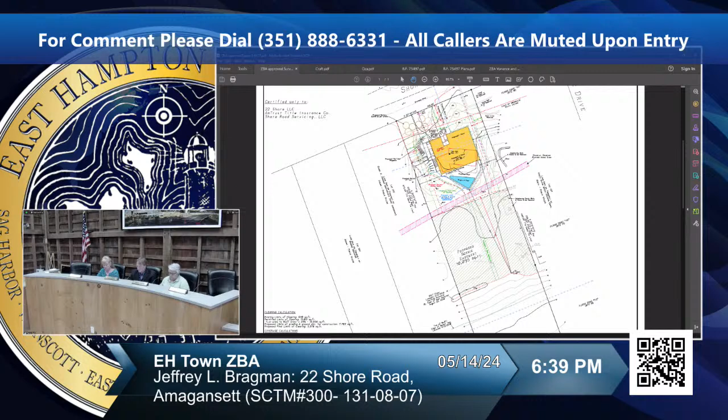Good evening, board members. My name is Jeff Bragman, and I represent the White Sands Motel Holding Corporation. This appeal is different from your usual involvement with appeals. I know the zoning board often hears about appeals taken from your decisions that go to court. An appeal made to your board is a little different in terms of the burden of proof and the rules of procedure.

Essentially, when you appeal the action of an administrative agent, your hearing is a do-over. It's a completely new hearing. Lawyers, to make it fancy, call it a de novo hearing, which probably sounds like what it means, which is it's a new hearing.

In this case, when you appeal what the building inspector has done, your obligation is to put yourself in the shoes of the building inspector and make any decision you think ought to have been made in the first place. So it's unlike an appeal from the zoning board, where there's deference to the local board, and the only way to overturn it is to show a very high standard of proof, which is arbitrary and capricious behavior. That's why courts often say, well, we can't substitute our judgment, we're relying on the expertise of the local board unless you show us it's completely unsupported by substantial evidence. Not the case in what we're doing today.

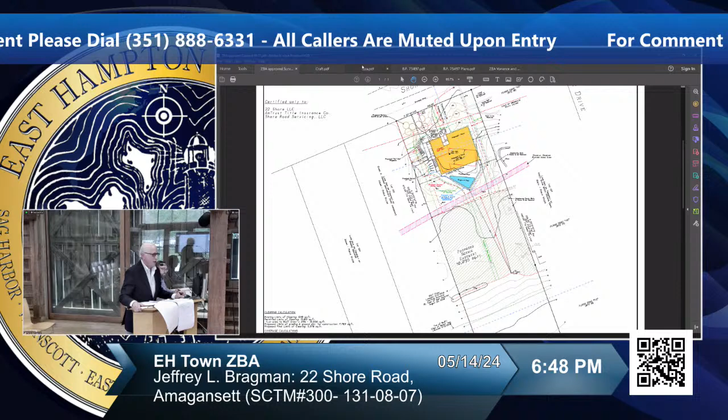I want to just take a look at the exhibits. The first one you can skip over, it's the survey. I just gave it to you so you'd know east from west. The second one is the architectural plan, labeled A301, and they show two elevations of the house. You may remember this. The first one at the top is looking at it from the west, the western wall facing west, and the bottom one is looking at the wall facing the east.

And I've brought with me today two experts to give you a more detailed discussion about the plans, inconsistencies, omissions. Kevin Paul's a certified flood person, he'll tell you what the actual title is, and Dan Aiello is a structural engineer. A floodplain manager is what he's called.

And what's striking about the first elevation is that it basically doesn't show anything other than the side of the house. And just looking at it, as someone reading the drawing, not an expert, it looks like there's going to be a pool that's elevated and an area that's going to be occupied by fill, adjacent to that room that they're going to create below grade, and there looks to be other fill on the other side of it, and there's no other structure, nothing else really revealed there that would excite any great deal of attention.

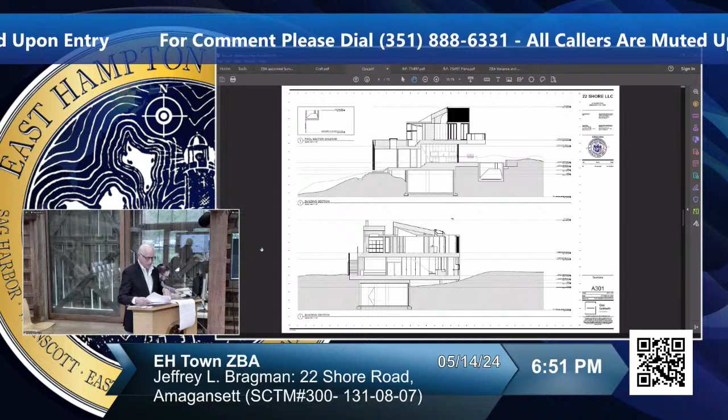The second exhibit that I've given you is an excerpt from the construction protocol that was given to you at the zoning board, and you may remember. Hold on, can I ask you, your cover page to that...

A301 says 'no natural grade,' yellow highlighted. What are you referring to? On which page? Your cover page here says Exhibit B, it says no natural grade, yellow highlighted. What are you referring to?

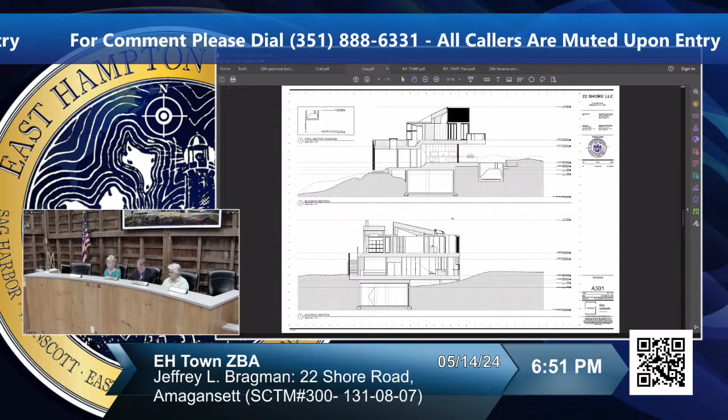It's real tiny, a very tiny yellow highlight. But it's not really part of my discussion here. That's what they identified as natural grade. They took natural grade from a measurement down by mean high water, and it's repeated on here. But the point of this drawing is just what the drawing shows, not the yellow highlight. Sorry about that.

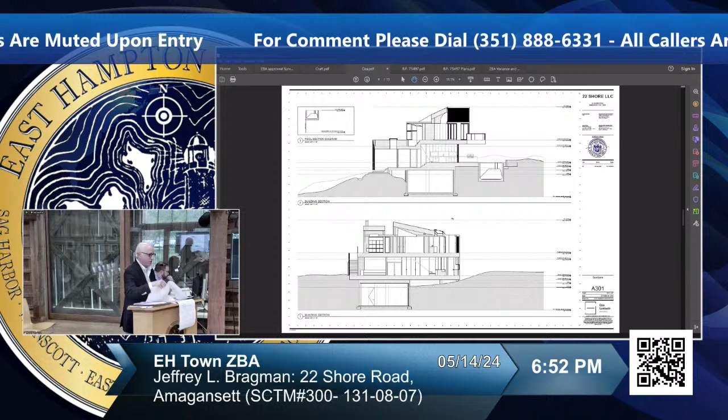The next exhibit was the construction protocol, an excerpt from the construction protocol that was given to you on the night of the presentation. It has two areas that are yellow highlighted, and basically it gives a little bit more information about how they were going to undertake the construction. You may recall that the architect, who I know is here tonight, basically said that they were going to carve out a horseshoe-shaped cut in the dune.

They were going to install a lagging wall, and then—I'm paraphrasing, but you can go back to the meeting if you think I've misstated something he said—they would try to do that as close to the edge of the construction as they can get. Once that's up, it's basically pretty typical construction. We are going to build up some structures to raise the pool and raise the house, and then we're going to backfill it. That's what he said.

When you look at the construction protocol on item 17, it indicates that the lagging wall was going to be removed. The lagging wall, for your information—I had to look it up—is the horizontal wood. They put in pilings they call soldier pilings because they stand at attention, and then they fill them in with lagging wood, which distributes, as I understand it, the load horizontally. So it's called a lagging wall.

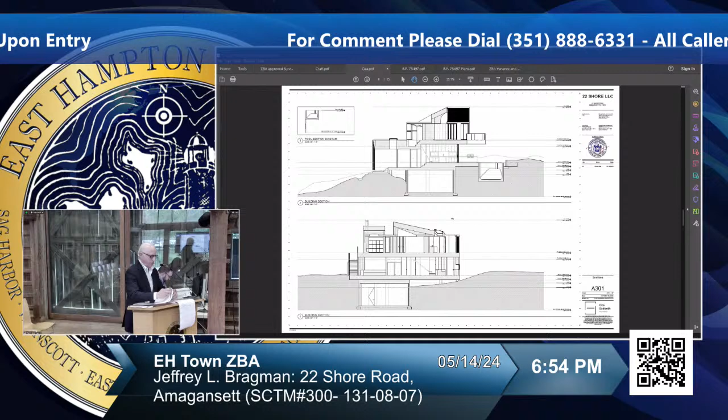So this construction protocol says we're going to remove the lagging wall, and the architect said then we're going to—again, I don't know if this is the technical word—fill the space. I assumed it was with material they had excavated, that they're going to put it back in. He also said that everything below there was going to be breakaway structures, concrete was going to be breakaway structure, because the other comment in the construction protocol was that they were going to excavate down to the level where they were going to put the concrete mat at the natural grade, basically. He said when we create that room that they wanted to create, everything's going to be breakaway—breakaway walls, breakaway concrete, everything's going to break away.

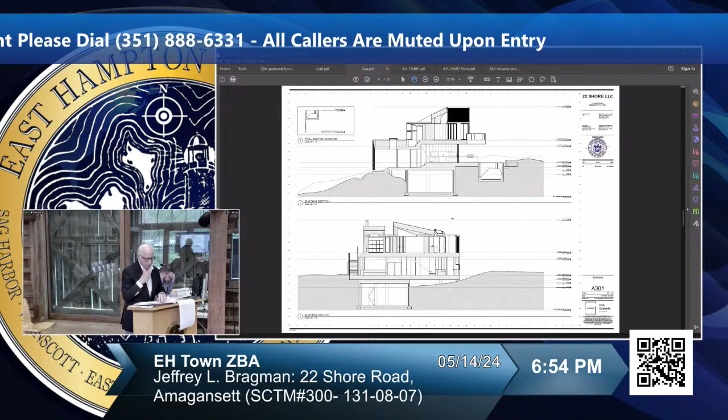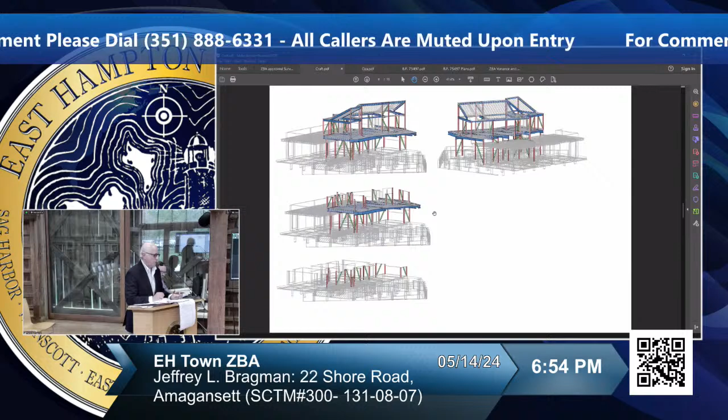So what I want to do now is take you to Exhibit D. This is the structural plan. This went to the building inspector as the local administrator of the code. This is the document that actually tells you and shows you a little bit more about what they were going to do.

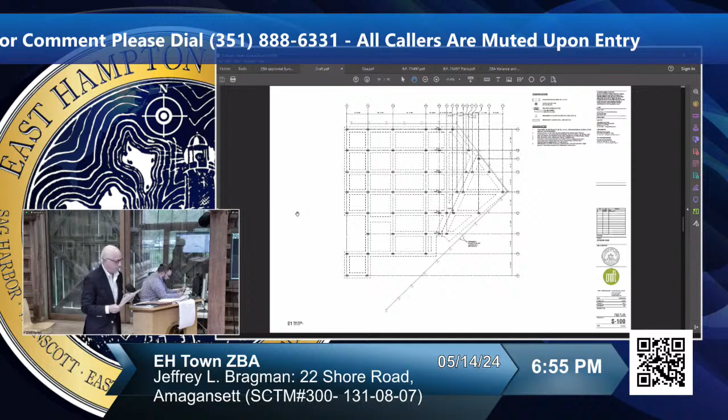It's a big structure, and I have photos if I can find them for you, but I don't know if I can find them handily. Okay, I'm going to hand this up.

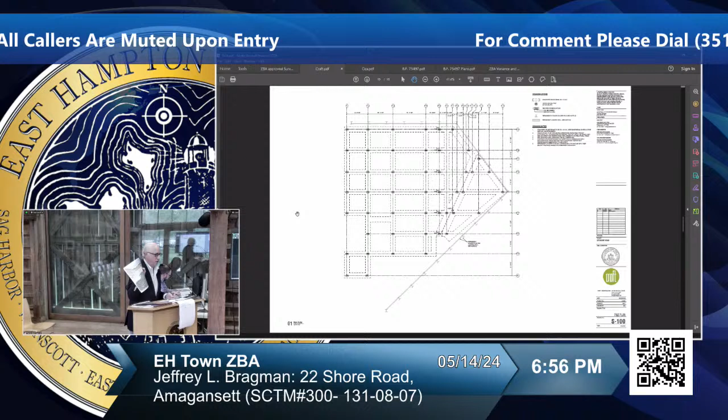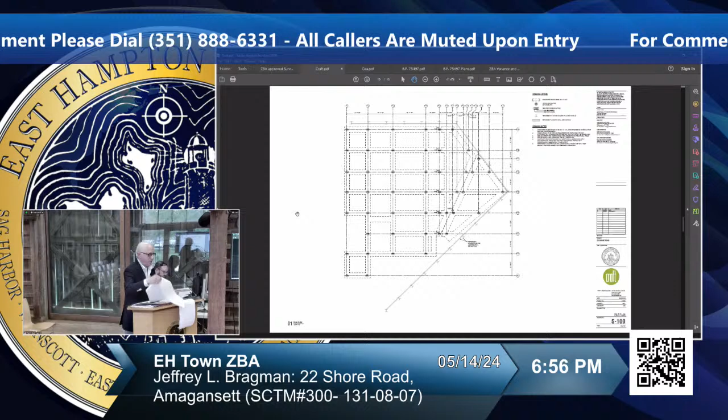The photo that I just gave you is a little bit of an indication of the scale of this wall, because you can see there's a front loader in front. There's some distance, but the wall looks to be about 15 or 16 feet tall. The second diagram in the same exhibit, if you flip the page, shows you the relationship between the proposed pool and the wall.

Now, what you may notice is different here is what I've yellow highlighted, and that is that the notes now say that the lagging wall is permanent. Not temporary, it's permanent. That's a pretty big change from what you were told when you looked at it as a zoning board. But that's what was given to the building inspector. The construction protocol said that it was to be removed. The architect said it was going to be backfilled with sand, and now it's a permanent wall.

In effect, what it is, is a seawall. They're effectively building an armored wall around the house, and it's going to extend as shown on these structural plans. The wings of it—the reason I showed you the first elevation—is because the wings of this extend against the elevations that I showed you. But when you saw the architectural plans, you didn't see any of this. The board was not aware of the structure that was going to go in there.

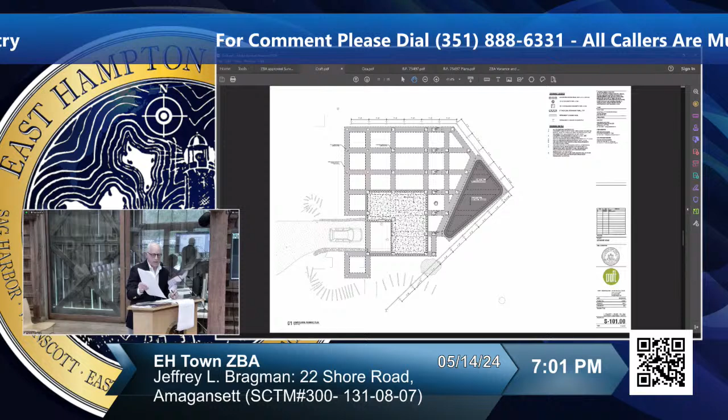And then I also gave you a 3D image in the same exhibit, which shows how that wall is going to be constructed. The first image just shows up to the first floor, basically, and then if you flip the page, it shows the higher area. But you can see that the wall, especially on the second 3D image, extends across that elevation that I showed you in the beginning when I began to speak. You can see it there, but you didn't see it in the architectural plans.

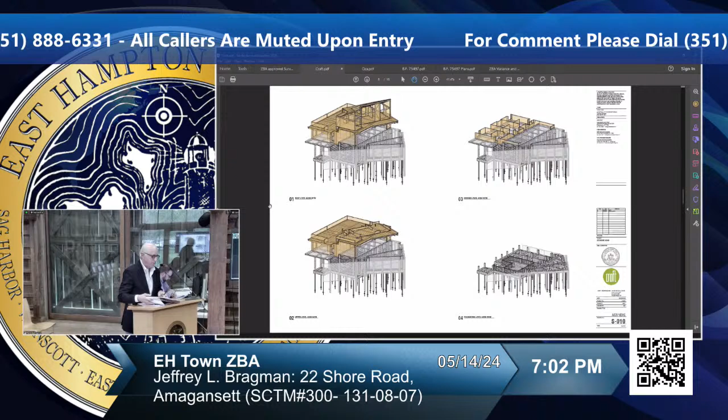Now, there are some other problems here, and they have to do with the breakaway walls, which we understand, and the concrete flooring that's supposed to be breakaway. But that's getting a little into the nitty-gritty and the more technical construction details, so I'm going to hand that over to the experts. As I said, Kevin Paul, who's the flood management person, and Dan Ayala, who's a structural engineer, can take you through the more technical aspects of the differences between what you saw and what we're getting. And then I want to reserve a little time to come back and just chat for a couple minutes. So we can start with, I guess, Kevin.

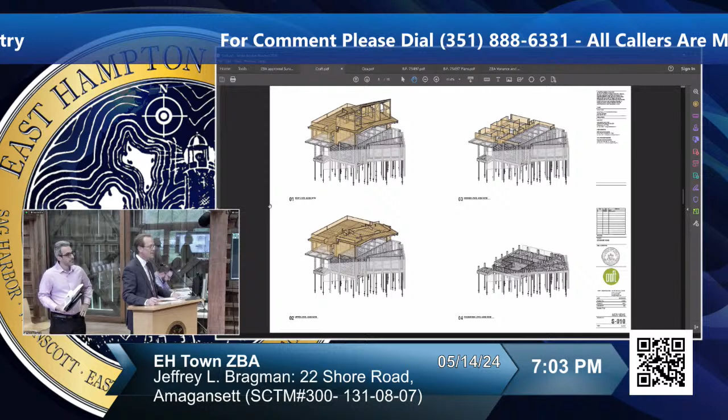Announce yourself, who you're with, and your address. Certainly, my name is Kevin Paul, I'm a registered architect and a certified floodplain manager, H2M Architects and Engineers, 538 Broad Hollow Road, Melville, New York, 11747. Okay, do you swear, affirm to tell the truth, the whole truth, and nothing but the truth? I do.

Thank you. Okay, before I introduce Dan, who is a structural engineer, I just want to give a little bit of background. Chairman, I must object at this point.

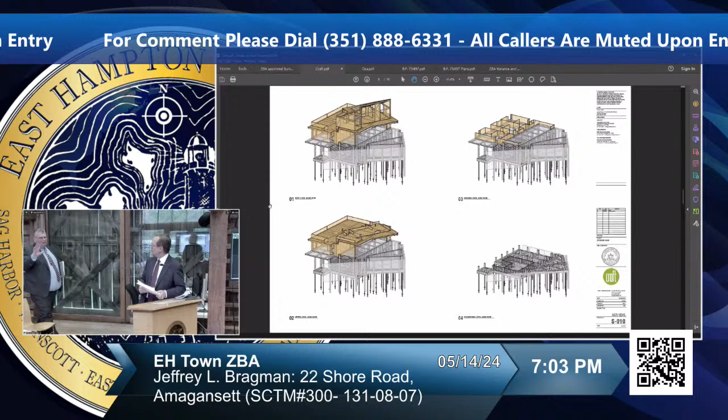Does the gentleman from H2M have a waiver from the town board to appear in front of this? As far as I know, H2M is a consultant to the town, and pursuant to the town ethics code, it would require a waiver to appear in front of this board. Does the gentleman at the microphone have a waiver to appear in front of this board?

These gentlemen work for H2M. They have nothing to do with the area of consultation that H2M is involved with in the town. They're advising the town on the senior center, on traffic and parking. They're in separate departments, they don't deal with each other, and we can submit paperwork on this afterwards. There's no conflict here. It's like the same thing with attorneys. If there's a separation between professionals in a larger organization and they don't deal with any of the administrative details or substance of the other representation, there's no conflict. They're licensed professionals just like attorneys. So we can deal with that, and I can give you paper on that if and when it becomes an issue. Just note my objection.

Thank you. We note your objection. Thank you.

Anyway, in working with Mr. Bragman and reviewing the structural plans and the architectural plans, I identified a couple of issues. And once again, from an architecture standpoint, what a lovely building. I understand you got an award from Peconic AIA, congratulations. Our concern really has to do with flood mitigation and the effect that not only this retaining wall has on the dune, but basically the idea that there's an enclosed space below the structure.

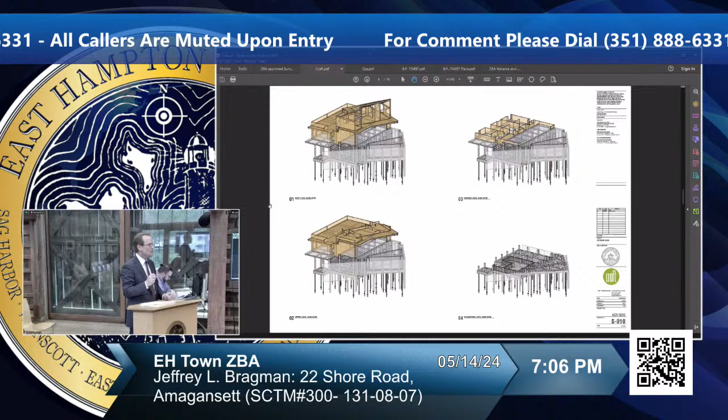So once again, the idea is that under FEMA and under the New York State Building Code, anything below the house should be open and allow the easy passage of water, hence breakaway walls. In our investigation of these plans, the walls that are labeled breakaway on the structural drawings are effectively fully reinforced. They're connected to the grade beam, which is connected to the pile, and also connected to the structure above, which is a violation of the building code.

This wall has to fail with 10 to 20 pounds per square foot of water or wave action on it. Reinforced the way it is, it's not going to fail. The biggest issue is that it's designed to withstand the backfill or the regrading of the sand back against the walls. If it can withstand the sand that's backfilled against the walls, it can't be breakaway.

So we have a bit of an issue with the fact that the concrete slab, which should be frangible, is not, as it's described in the plans. It has wire reinforcing in it. It's 5 inches, not 4 inches, which is what's determined by code. So there's a couple of inconsistencies with how this underneath space is actually constructed and how it should behave under code. That's really the main thing we looked at.

The code analysis we did, which is part of the exhibits, shows basically the loading you would expect at the top and the bottom, and some other issues. There's no flood vents, which would normally be required even in previous codes. Flood vents were not required in the VE zone or the coastal A zone before, but they now are. There's also some mechanical equipment and electrical outlets down there that shouldn't be.

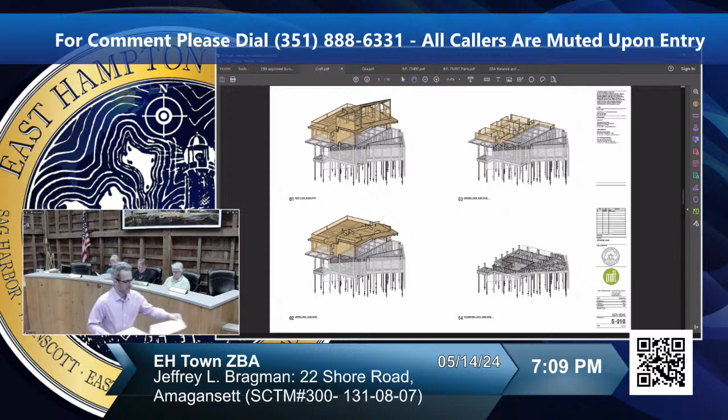So I have here a little memo outlining the issues that we found, from our third party review. If you get to the third page, that's the calculation that I performed.

So if you turn to the second page, there's an image, attachment 1 of my calculations. More or less, we proved that the pressure you're going to see at the bottom of that wall is 660 pounds per square foot, which is over 30 times what the code allowable limit is.

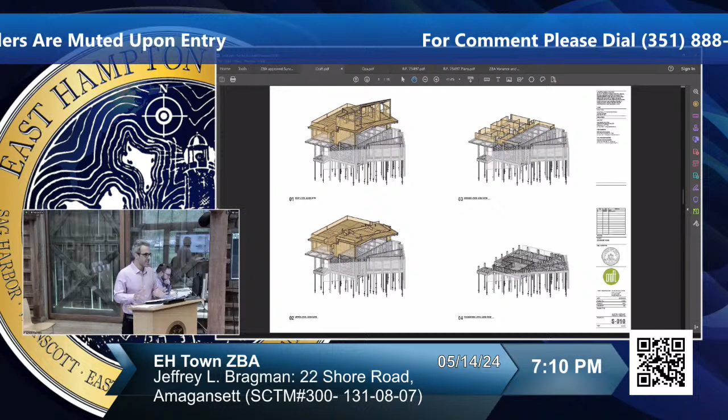So if you read the code, it more or less says walls designed to break away or collapse, without causing collapse, displacement, or other structural damage to the elevated portion of the building or supporting foundation system, shall have a resistance not less than 10 pounds per square foot and not more than 20 pounds per square foot, as determined using allowable stress design methods. So basically what we proved is that you're going to have over 30 times that amount of pressure on the bottom of that wall. Based on that, it's not code compliant with the New York State Building Code.

Is that based on the reinforcing of the wall or the backfilling of the wall? The backfilling of the wall. So just the backfill, not wave action.

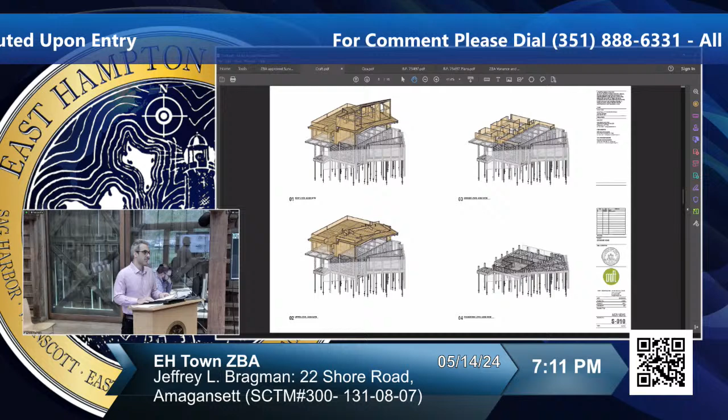So then we further analyzed it, just to see if it worked, and more or less the wall fails even when it's backfilled. It's improperly designed from just a code standpoint of backfill alone, not even flood analysis. So there are some issues with the design of this wall. It's kind of in between, over-designed and also under-designed, if that makes sense. It's over-designed for flood breakaway, but under-designed for structural performance of being backfilled with soil. So we have some issues here with that detail.

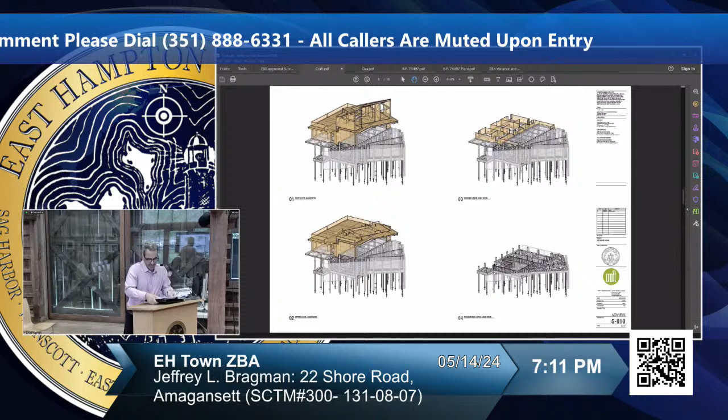Subject to whatever the team here has to say, we think that this aspect of the design that the board wasn't aware of, I believe, when it was acting as a ZBA on the natural resources special permit, was important to show you when it came to light as part of the flood hazard overlay application to the local administrator, who is the building inspector.

That doesn't comply with the construction policy that I read to you, that you can't have artificial structures that interfere with runoff and drainage and wave action. And construction should not continue on this.

Also, it's interesting that the walls and the concrete are too strong for breakaway walls on wave action, and they're too weak to support the backfilling that the architect told you he was going to do when he talked to you on the NRSP, when it was in front of the zoning board.

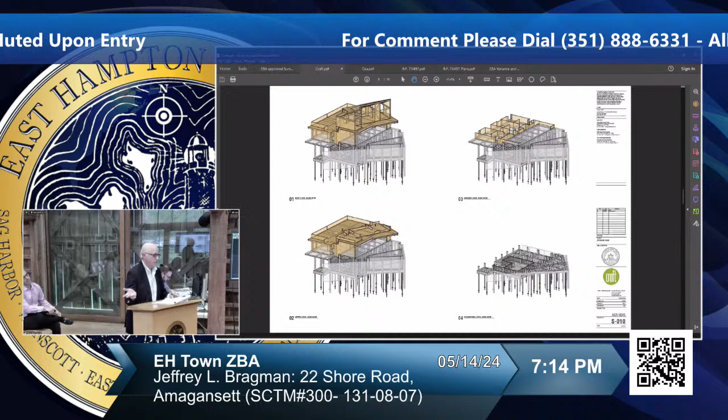I mean, I can certainly wait to hear what the other side says, but we think that some action should be taken.

Thank you. So we have two other firms here representing applicants. We have the Adam Miller Group, represented by Denise Schoen, and we have Michael Sendlenski from the Sendlenski Law Group.

I'm wondering if the best avenue is, Denise, if you go, because from a time you were there from the previous application, and then Michael, maybe you can follow up with yours, so Denise, come on up. And then, before, I want to hear, I'd like to hear from the opposing sides before we hear from the building inspector. I think that makes sense, right? Yeah. Yeah.

Good evening, Mr. Chairman, members of the board, and council. My name is Denise Schoen. I'm an attorney with the Adam Miller Group at 2461 Main Street in Bridgehampton, New York, here tonight on behalf of 22 Shore LLC, which, as you mentioned, Mr. Chairman, was the applicant in connection with this application. The applicant has subsequently sold the property to a third party who is represented tonight by attorney Michael Sendlenski.

First, I'd like to point out that we received Mr. Bragman's application several months ago, and we have reviewed it and responded to it in detail in both written submissions and tonight verbally. We'll do the same thing. One of my concerns is that the application that was submitted in terms of the appeal does not point out any of the details that we heard tonight. So I didn't look at those details.

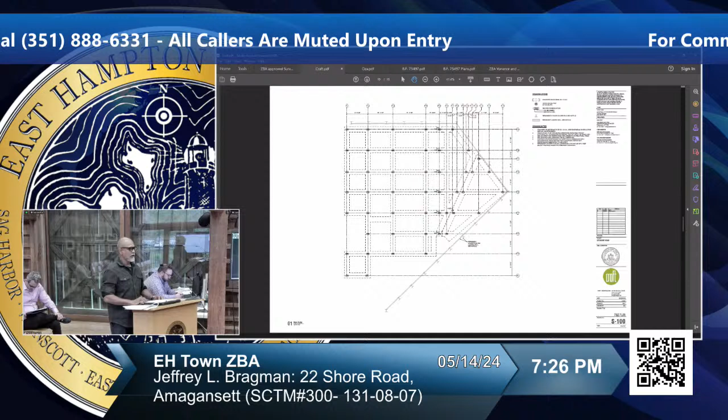Well, on those breakaway walls, they have to be designed to withhold the backfill, right? Yes, the grade, absolutely. My understanding is that's the way it is designed. So in a sense, they're a retaining wall. Well, they have to retain the soil, but when there's water pressure, they fail.

There are breakaway walls in all kinds of cases on properties on the coast where they are backfilled to some level. It's not like all breakaway walls in places below BFE have no backfill against them, that they're completely open void spaces. This is a pretty common situation.

No, I understand the breakaway wall. Okay. But as I said earlier, it's an expertise that I wouldn't want to speak to because it isn't mine. So I would like to have the engineers who work with us on this speak to you about it. But I would like to again underscore one of the reasons for the soldier piles and how this design is done is principally to conserve the dune on the seaward side. That was our principal motivation.

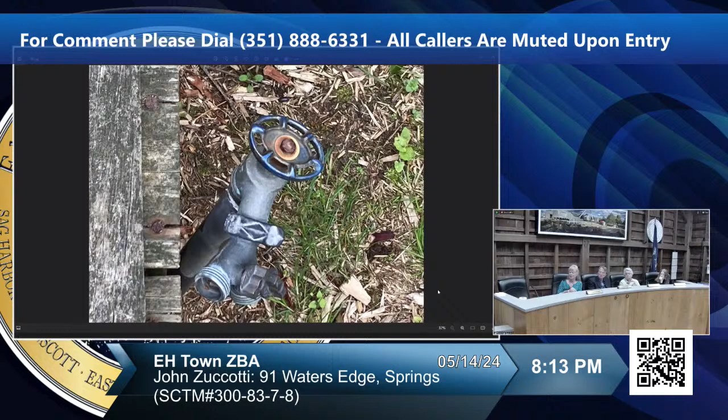And again, all this piping is along, as you walk up the stairs - the piping goes from the bottom to the top. Next, please. That might be the last photo. Thank you, Morgan. Thank you.

Do we have the applicant here?

How are you? How are you, Deborah? Great. How are you doing? Good.

All right. Good evening, Chairperson and members of the board. I appreciate that we're going forward this evening. I'm Deborah Choron of Matthews, Kirst, Cooley, and Choron on behalf of John Zuccotti, the owner of 91 Waters Edge. The Zuccottis unfortunately couldn't be here tonight, so they recently retained our firm to appear on their behalf. They send their appreciation for your time and are tuning in live from home, remaining actively engaged. Keith Grimes and his associate are here - they prepared the original application, which is only natural because the main objective of the application is the reconstruction of an existing bulkhead.

From the outset, with regard to the bulkhead, I would note that the building department's files indicate that repairs to this bulkhead have historically been approved by the town, the DEC, and the trustees. We appreciate the planning department's technical analysis memo expressly stating that it does not have objections to the bulkhead's reconstruction, since work of this scope is fairly routine in this part of town for maintenance purposes.

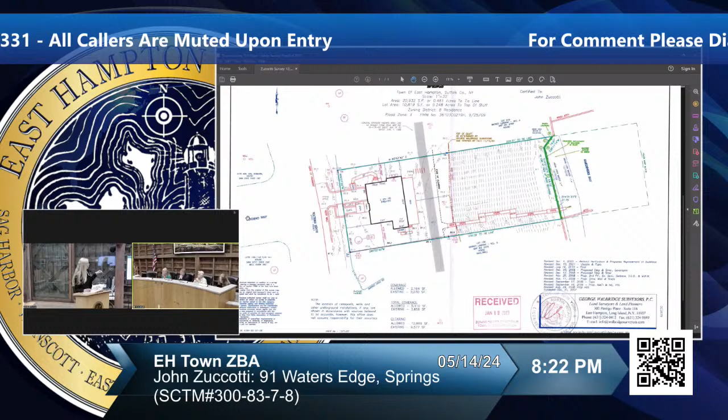When you look at the 2 outdoor showers, the one we are not seeking relief for is pre-existing non-conforming. It would itself require relief if we were applying for it today. So we've got to pick our poison here with relation to which shower we want.

The older shower, which is not the subject of this application, is located off of the kitchen. The shower that is the subject of this application is off of a bedroom, and the plumbing for it was already in existence when the Zuccottis purchased the property. So they found themselves using the shower they're applying for instead of the older one, and it evolved to have the cedar siding, but it was never the intention to be greedy and have 2 superfluous outdoor showers. If the dual showers are a sticking point, they would propose to remove the older one.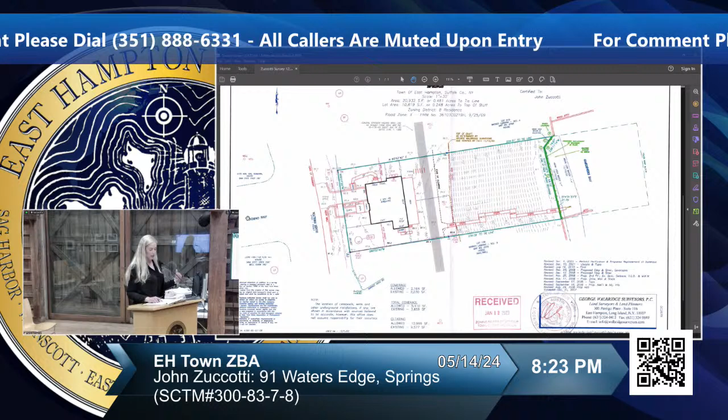It's simply not pleasant to take a shower immediately adjacent to your kitchen where other people are cooking and hanging out. But if it's not a legal shower today and you're seeking relief from it, it wouldn't be considered pre-existing non-conforming. Right, so the one we are proposing relief for is not pre-existing non-conforming. The other one, I was just noting, would need similar relief if we were applying for it today.

The one by the steps on the south side? The one on the north side by the kitchen is the pre-existing non-conforming one with setbacks issues. I thought that was a conforming shower. Right, so neither of them would be fully conforming. If we had to pick a shower, we definitely want the one off the bedroom, not off the kitchen—the one on the south side, the one that's included in this application.

So again, the practical answer, better than the legal answer: you don't want to walk through your kitchen in a towel when you have guests over. You definitely want to be using the one off your bedroom, and that's how this one evolved. At first it was just older piping that they were using, not the older shower. Considering both have existed without incident, if we're picking our poison, it would be the applicant's preference to pursue legalizing the new one that's the subject of the application.

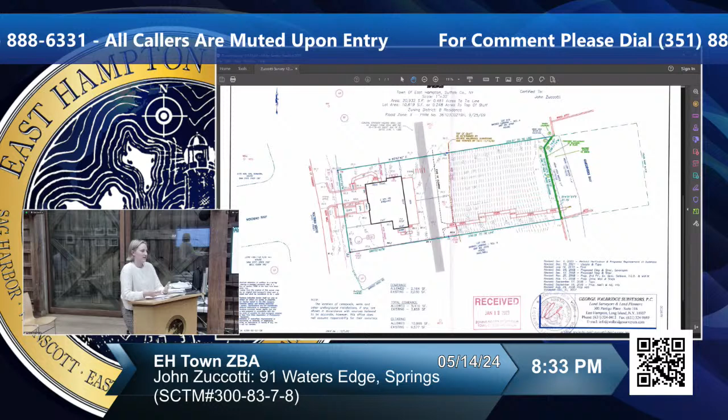It kind of just runs alongside the staircase, so the planning department doesn't really have any objections to it. If it's not being used anymore, it probably should be removed, just so it doesn't become debris. But again, that's kind of up to the applicant to speak to. Thank you, Morgan.

Anybody in the public who would like to address this application? Matt, is there anybody online? You have zero callers.

Can we have a motion? I just have one more question for Ms. Shoren on the shower, if I may. I know what you're saying about going to the kitchen with your towel while people are hanging out, but was there an option—I don't know, obviously on the internal floor plan—on the south side of the house that would have been in a location for better access to the house, but further back from the setback?

No, I don't believe so. I think it comes off the master bedroom there, so I think that's where the entry point is.

That's how it was explained to me. I haven't been on the interior of the house, but as we just heard, the piping for this outdoor shower was in existence and it wouldn't theoretically require a building permit. So it did grow in nature, but the use of it has been rinsing off, and that's just what they preferred. They've been using it since they owned the property and then built it out to be more enjoyable and private. So the use and intensity of it really hasn't changed at all.

The cedar siding and then the slate below is the addition that technically would qualify it as a structure, but it's been there without incident and without any detriment to the neighborhood as far as I am aware. So I think it does satisfy the criteria for approval, and no one's looking to intensify the use by having a bunch of outdoor showers.

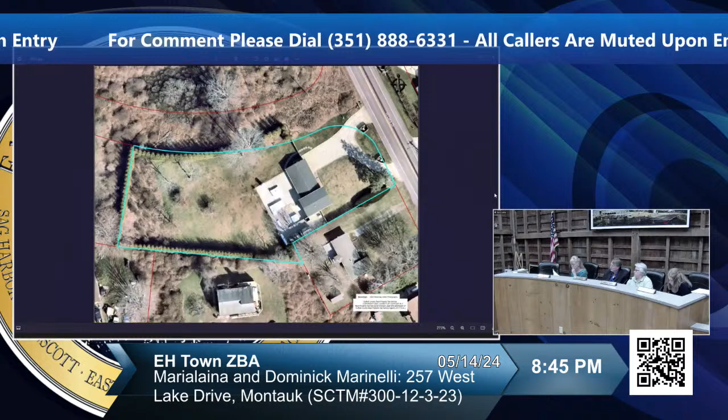And another shot of some of the patio and the sheds and the gravel, now the driveway. And another shot of the front of the property. And yeah, that's the aerial, so that's it.

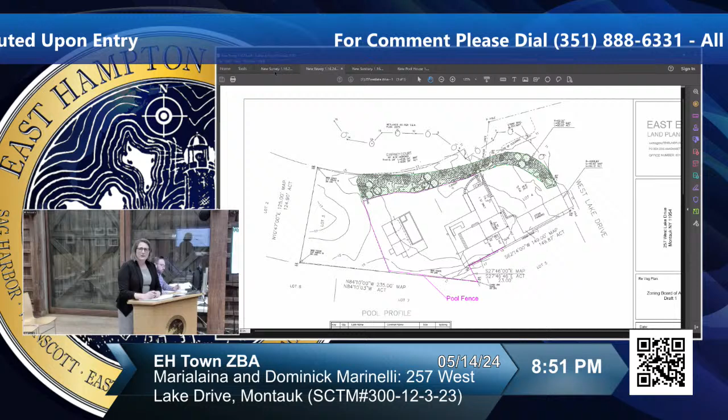They need a natural resources special permit. He's requesting a swimming pool and 2 accessory structures. They're labeled pool houses, but they're dry - they don't have plumbing. So actually they're just accessory structures next to a swimming pool.

That part of the application doesn't require variances. There's a dry well and a conforming location for the swimming pool. Dry wells have been installed, and will be installed, in connection with the existing patio to control runoff. The gutters and leaders on the property have all been connected with the exception of one that will be remediated and is on order right now.

In terms of the character of the neighborhood, we surveyed the area. Katie found about 20 pools in the immediate vicinity within about 450 yards of the property. So definitely an accessory structure that you see quite often on West Lake Drive, not something that would be unusual in the area.

The one important aspect of the application is that the asphalt driveway that was on the north of the property is being moved to the south of the property, being reduced in size from 3,000 square feet to 1,400 square feet, and will have an IA septic system underneath it. So instead of taking up more real estate with septic and a driveway.

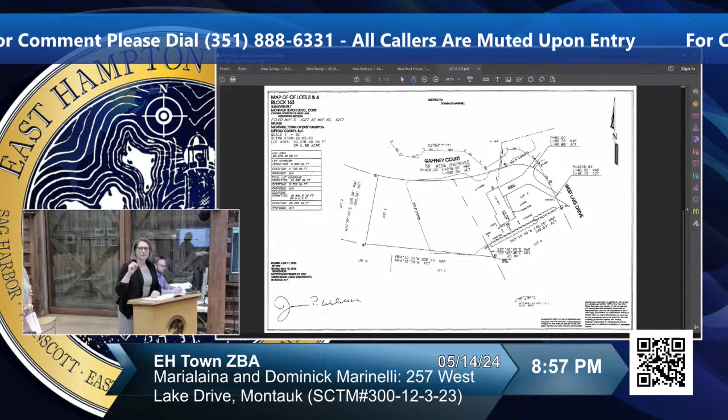Of course. Okay, now also talk about the clearing - you said there's going to be. Yes, that was my question. I mean, how much of this is on the C of O before? Oh, so right now, the clearing is in compliance with what we have on the C of O, so we're completely legal as far as clearing. We are proposing to revegetate so that it's less non-conforming. Well, why can't you bring it back to conforming?

Complete conformity. Yeah, I'll let Katie answer that.

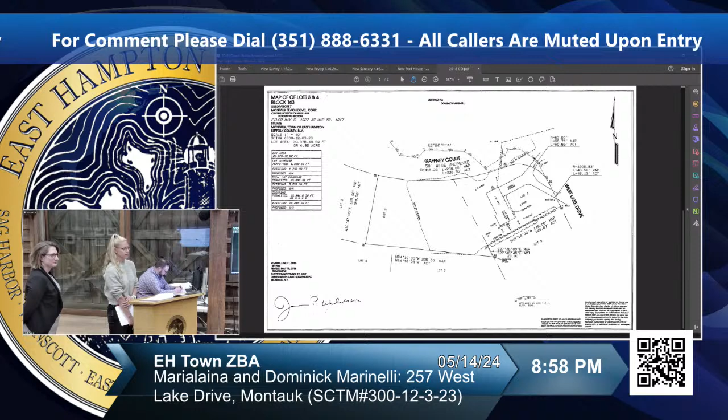And we are proposing, but one of the things we're going to be looking at is whether or not the mitigation adequately outweighs the egregious stuff they've done on this property. I mean, I'm looking at two what you call dry pool houses, and based on their record here, what they've done, how do we know they're going to be dry in perpetuity after a C of O? I mean, if it looks like a duck, it's a duck, right? So it might act like a duck in the future, with this culvert.

So in terms of the clearing number, is that something that I can discuss with the client, and maybe we will increase that number if he's okay with that?

I mean, where the buffer is, and where they're proposing is, the idea is to protect those wetlands even more. And trust me, I understand the driveway, the culvert, and that patio, it's a lot. So we're trying to rectify the situation here and give as much as we can, but it's more than that.

It's the line of trees that go all the way around that property line into wetlands. That's even more egregious. It's pretty brazen what they've done here, and the culverting is more than brazen.

Except that culvert - I mean, that driveway used to be asphalt. Granted, now it is larger, but it is stone, and we are proposing... Okay, show us. So here's the existing driveway. It's quite large, right? I mean, it's roughly 3,000 square feet.

We're now proposing to move the driveway here, which is as far away from wetlands as possible. And what's the upgraded size? The sanitary system is going to go underneath there, so there will be - I don't actually think there's a covenant anymore, but it's still a variance with the health department to get that approved. So the driveway will revert back to the original size, but it'll be farther away from the wetland. Correct, although it will also be pervious because the original one was asphalt.

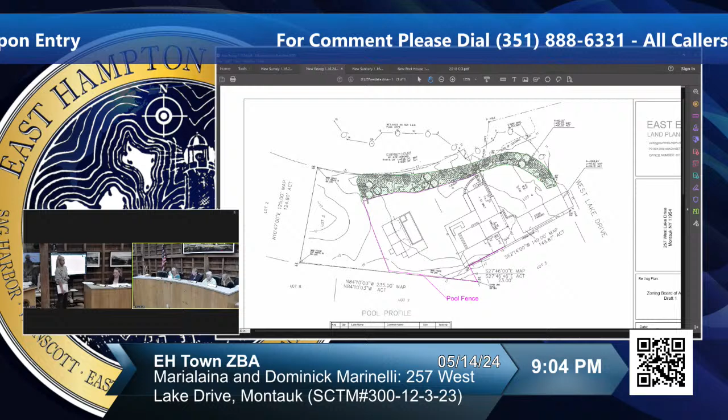And the deer fencing is going to come out from beyond that? Yeah, and all the way from north to south also. And it's all going to move in - if the pool were to be approved, it's all going to move in toward the pool, big part of it. Correct, yes, and it would be on the inside, so it would prevent any possible clearing.

But pools are not a given in this area either - total natural resource special permits. Understood, understood.

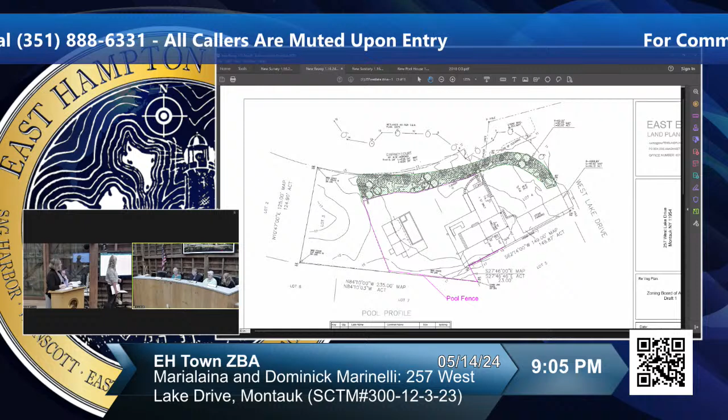We do think that the standards here are met, and that the property being an acre in size, after the removal of roughly half of the patio will have a swimming pool and two accessory structures. It's not an overly ambitious plan for such a large property. We tried to keep it to the minimum of what the client wanted but keep the mitigation to the maximum so that we could demonstrate to the board our seriousness.

Going back to the pool house - if the pool house is quote dry, and it says there's an outdoor shower there, how is it a dry pool house?

Actually, we can remove that. You gotta get a water line out there - it's gonna have a shut-off valve inside that thing, at least he's gonna be able to rough it out later. So that outdoor shower, he's willing to remove, and I can certainly have that updated. He already has an outdoor shower by the house.

What, can I? Okay, you done?

I'm curious why the pool and the two pool houses are where they are. Maybe it was to maximize their distance from wetlands, but I'm not trying to redesign the project. I'm not comfortable telling them where to put it.

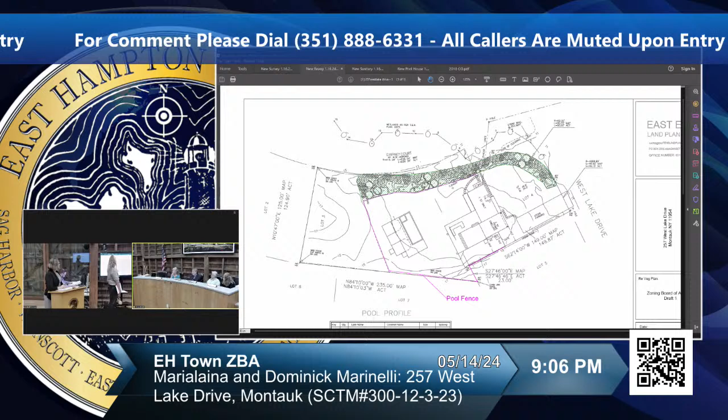No, we have a project before us and that's what we should be looking at. So you're just speaking for yourself. I mean, there's a question - does the survey have a setback? There's really only one spot where it's 100 feet. Sorry Vice Chair, all I was trying to get at, if there was a way of revegetating more on the property. Okay, that's not - you can't speak for the rest of us.

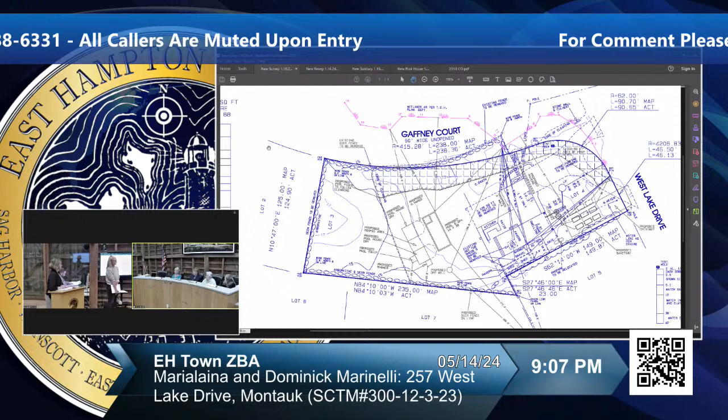If the pool was pushed back any further, there would be more clearing, so it meets the 100-foot setback for an NRSP. That's why it was put there. It meets the setbacks for the NRSP. The pool is an accessory structure, exactly 100.3, it meets the code. And if there's no builder's error that happens - true, it does have to be staked in the field. That's true, that's a new law.

That's a good idea. All right, we should probably hear from the planning department. Yes, let's hear. Absolutely, yes. I think so.

Tyler Borsak for the planning department. Do you swear or affirm to tell the truth, the whole truth, and nothing but the truth? I do.

The subject property is located on the west side of West Lake Drive in Montauk. The application in front of the ZBA is to approve construction of a swimming pool, two pool houses or sheds, a roofed patio and associated structures, to relocate the driveway which required permits to remain, and to upgrade the sanitary system.

The project also requests to allow an existing patio and paver area with outdoor kitchen to remain, an existing outdoor shower, and to relocate fencing which was constructed off the property and partially within wetlands to the north. Several non-conforming and unpermitted structures are now proposed to be removed or remediated, including revegetating existing clearing which extended off the property, and removing two sheds on the southern property line along with surrounding gravel, which are non-conforming to side yard, lot line setbacks, and pyramid requirements.

The property is located in an area of Montauk with an extensive wetland system to the north, which extends well beyond the boundaries of the subject parcel and is within jurisdiction of several surrounding properties. These wetlands are highly diverse with species of woody and herbaceous plants that constitute an integral part of the natural environment, and more specifically, the hydrologic system.

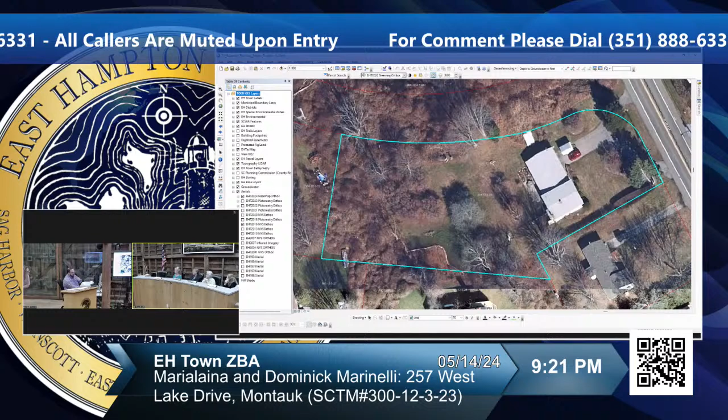And the 2018 aerials, you can see construction's going on, but you can see there's a small patio in the back of the house. The driveway is much smaller, as you can see once you swipe it away. So that's what you're looking at - prior, what was CO'd is essentially this, and this is what's here today.

So that 2016 image, even though just from the aerial it looks like there's more vegetation, it's still - that 2016 image represented 29,416 square feet of clearing. Yes, it was lawn underneath trees essentially, the understory was clear and everything. There's no habitat value for that.

And do you have a view of sort of what I asked? I mean, the arborvitae extending well beyond the property line, there was clearing that went along with it. I think I stuck my head in, it's like mulched in there.

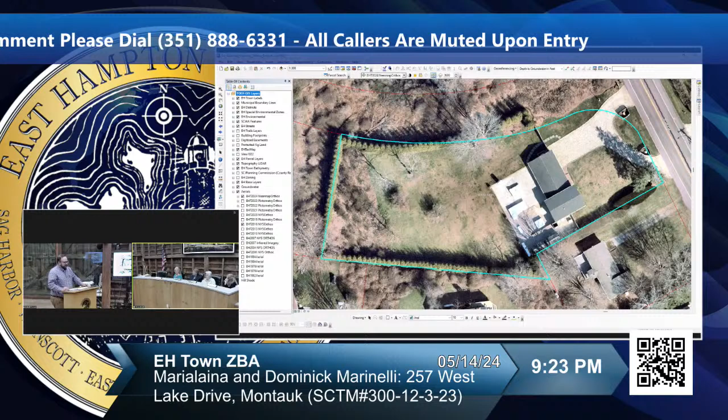What is your view? Is it more disturbing? I haven't thought about it. I would lean towards thinking that native vegetation would be better, but if the record's going to be left open, maybe I'll add something to the file, just discuss it internally. It's just not something I even considered up until tonight. But I would lean towards thinking that removing it and putting something native would be better, though I can understand the idea of not wanting to disturb it.

It's not an invasive plant, not native. But since it's not an invasive plant, are you doing more harm? I'm not 100% certain.

Well, once they move the fence, what are the deer gonna do? They're not gonna be able to maintain it though, because you can't maintain something off your property. What are they gonna do about irrigation? Yeah, it would just have to go wild at that point. Well, that may be all well and good because as soon as they move the wire fence that's in there, the deer will be happy to eat the arborvitae.

I'm struggling with the re-veg. Okay, the IA system is nice, but there's a whole bunch of stuff that's going on here that still disturbs me.

The pool - proposing a pool here. Could we leave the record open and I could discuss that with the client, to bring it into conformity?

And regarding those trees, I mean, I think you guys were there - they're not small trees, so removing them, they have a root system. I personally think that would cause a lot more harm, especially because even if it was an invasive plant, I get it 100%, but... You mean the ones that are off the property? Yes, those ones. Well, some of them are on the property, quite a line all the way around, but you can see how much is off there. Yeah, and they wouldn't be maintained, like you said, since the fence is going to move.

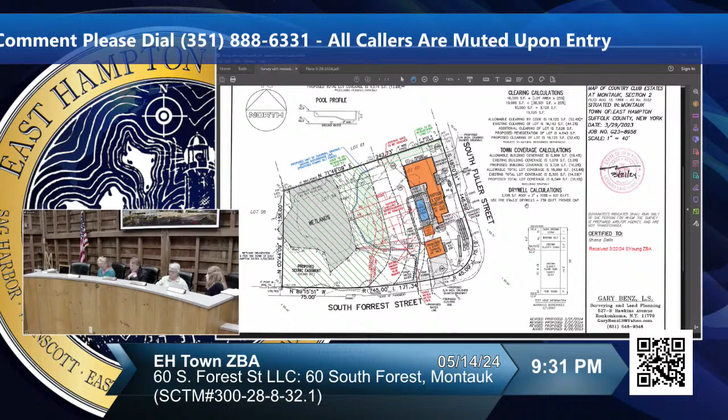All right, let's move along. We have an administrative application this evening at 60 South Forest Street, LLC, 60 South Forest, Montauk, tax map number 300-28-8-32.1. That's to demolish the existing residence and construct a 3,270 square foot two-story residence with a 550 square foot attached garage, 490 square foot of decking and porches, 400 square foot of terrace, 600 square foot of detached garage, 448 square foot of swimming pool, 200 square foot of pool patio, 196 square feet of pool house, and an IA sanitary system on a property containing freshwater wetlands.

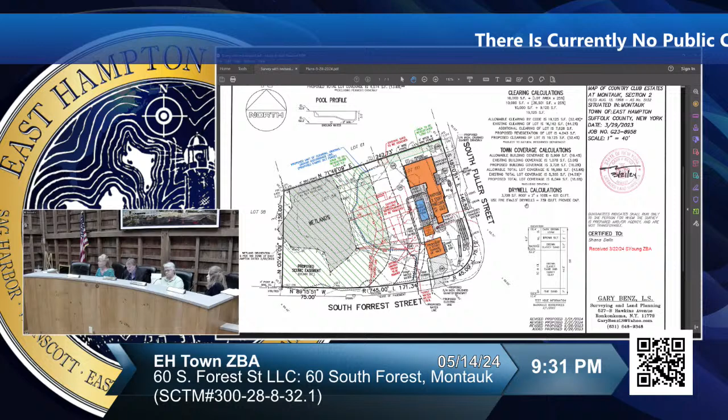Okay, this was on 2 weeks ago, and I can't remember why it got pushed off. But they're demolishing a roughly 1,872 square foot residence, which is located 34 feet from the edge of wetlands. They're proposing a 3,270 square foot two-story residence, which meets the 100-foot setback. The sanitary system is currently 83 feet from wetlands, and it will be 150 feet away from wetlands. No change in density. It's a 4-bedroom house and will be a 4-bedroom house.

The owner is also proposing to revegetate 4,643 square feet, and will also include a 23,090 square foot scenic easement, which is roughly half the property. The pool is, I think, 360 square feet. There's a letter of support from the neighbor to the north.

What other information do I have? Morgan also included an aerial of the neighborhood with some GFA numbers in case you're interested in those, to see what else has been done in the area.

How big is this lot? This is 40, 45, it looks like. Lot area is 45,727 square feet total. That does not include... that includes the wetland area. Oh, okay, sorry, excludes or includes? Includes. So what is the lot area excluding that? It's 36,501. And can you just run us through, I'm sorry.

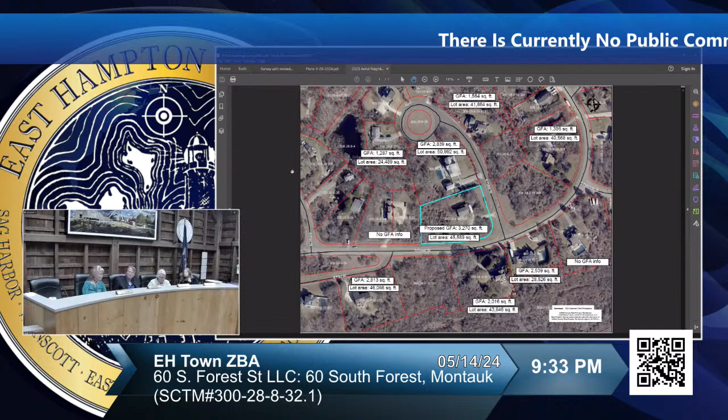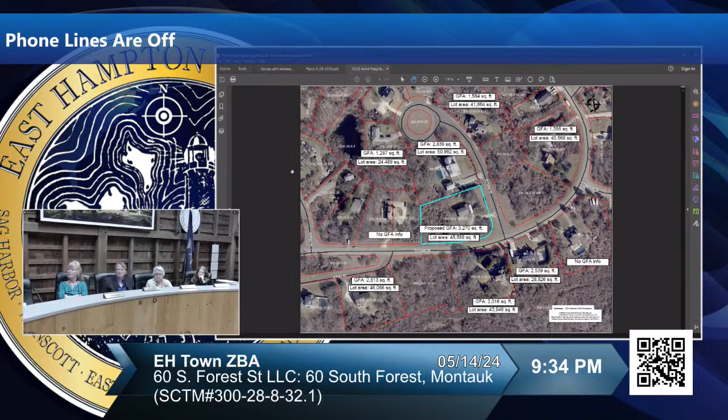No, could we see that aerial again? Sure. I mean, I live not far from this neighborhood, and I know how wet it is. There are pools, yes, but my concern here with this going admin is that it's maximizing quite a bit on the house. I think it was an increase of, how much, 75% or more? Plus a pool. And I believe the clearing number on this is... what is the clearing? Can you just run us through the coverages? Yeah, again, right. I believe the clearing is maxing out at the absolute maximum allowed, which disturbs me.

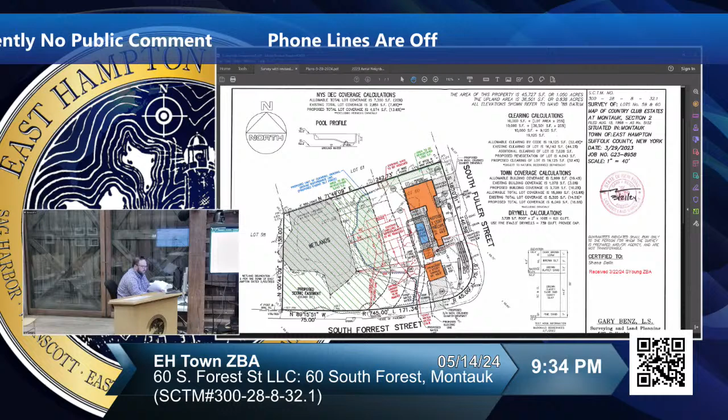Clearing is going from 16,142 to 19,125, where 19,125 is allowed. I don't know if that's before or after, let's see. Yeah, that's final clearing limits. Building coverage is going from 1,078 to 3,728, where 6,000 is allowed. Total coverage from 5,305 to 6,049. And GFA from 1,872 to 3,270, where 5,250 is allowed, but that's not really super relevant for the NRSP part of it.

And wetland setbacks, 34 feet to the decking, 46 for the residence as it is now, and 100 feet is proposed. What are the parameters which you are bringing, would this make you decide to bring this to us, administratively?

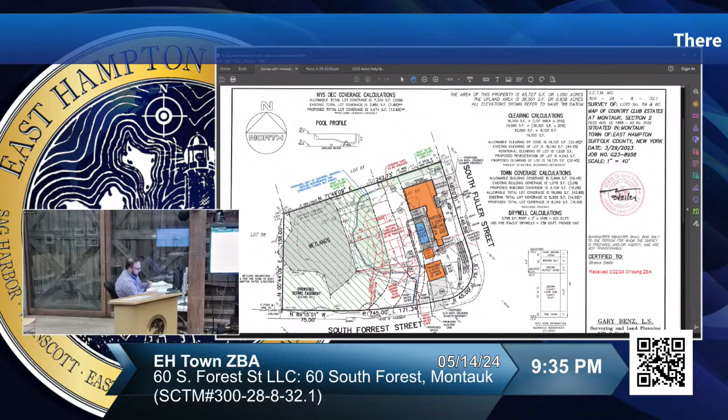We felt that there wasn't much else to be gained through a public hearing. It'll be a 20-day notice period in case there's any neighbor comments, but we were very comfortable, and Morgan worked with the applicant on the re-veg, on the wetland buffer, which is 50 feet, scenic easement's 50 feet around it. The sanitary upgrade is required, but between the scenic easement and the re-veg, we were comfortable with the mitigation being offered, and didn't feel that there was much else to be gained from going to a public hearing, which is why we were comfortable with it going without a hearing, even though the clearing is going to be maximum when it's done.

I don't know, I'm just not comfortable.

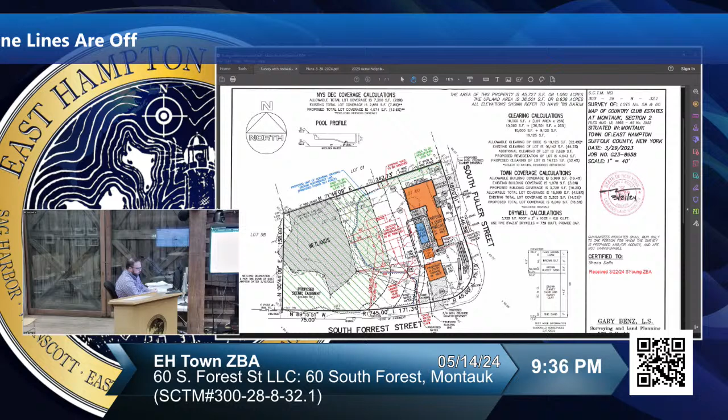Yeah, I think there are considerable environmental benefits that you named, right? Like the scenic easement, the re-veg, better wetland, better setbacks. But at the end of the day, the decision to go admin versus full public hearing, it's not about what we think of the application. I don't want anything to be construed as like I'm concerned or not in favor of it. But I do think the thing to be gained is that when we have a complete redevelopment of properties with important expansions, there's always a benefit of the full review of the board and the full public hearing process for these full redevelopments. There's a transparency to it. And so that's why I'm uncomfortable proceeding admin only, notwithstanding your good advice, on full redevelopments.

So are there any variances requested? No, it couldn't be. So that's correct. So it's bringing a property into conformity. Right. And we're getting an environmental benefit. And that would be nice for people to hear about too.

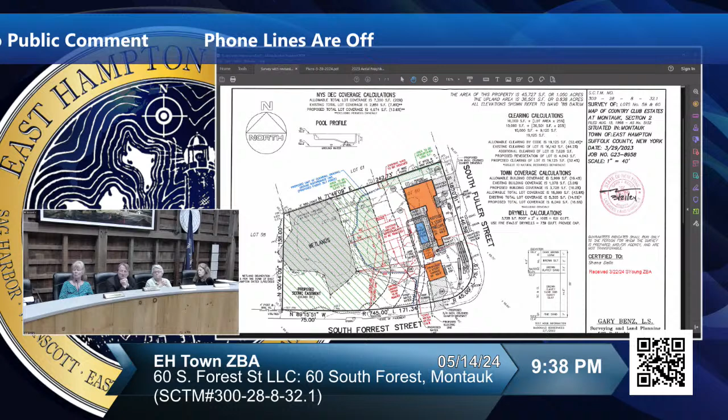I just want to make sure that we're not misunderstanding, because there still is going to be a notice requirement, right? There still is, it's 20 days, right? So this is also sort of clarifying for my own edification, because we've been reading the section of the code and it needs a little bit of work. But if we notice it and there are any neighbor or otherwise comments brought in, then it does potentially get kicked to a hearing, right? It has to be a substantial environmental concern, but yes.

Okay, and isn't it posted 20 days? 20 days, yeah. That's what I thought. But I've seen public make comment to ask for a public hearing for admin-only postings, and those, I've seen them ignored. Depending on what the comment is, or whatever it related to, it's history.

Okay, I'll weigh in. I think I would support it going to administrative. I think the environmental benefits outweigh the increase.

Go ahead, anybody else? There are a lot of positive things about it, but it's just the size overall. But the size is conforming. Yeah, but it needs an NRSP. I mean, we just had 22 Shore Road, that was an NRSP too. But anyway, you have a lot of developments that are NRSP only, I call it that.

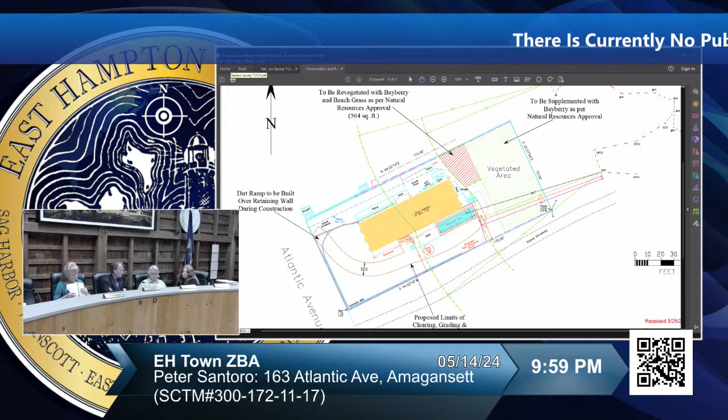But they've created lawn. He stated several times that he thought the concentration should be on the west side of the property, but a heavy wooded area, I would agree with that. I'm not saying it has to be all wooded, but can't have lawn like that was the last NRSP. We've got a lot of lawn, could be grasses, could be native, there could be some woody plants to protect some of the runoff that comes off the block.

No problem with that. Yeah. For you? No, I'm actually not in agreement at all. Are you not done? No, I'm done.

I assume it's part of the conditions that they would have to protect it anyway, right? So whenever we get that, can you say that a little louder? I just want to make sure they would have to protect where they're going. Well, there would have to be a limiting fence too for construction, so let's condition a limiting fence and septic system overlay.

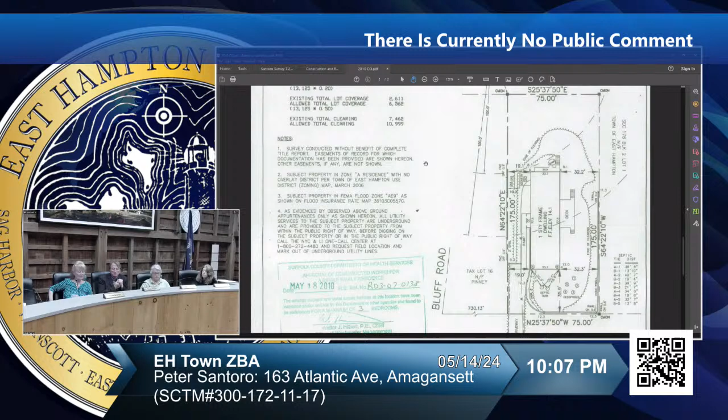But we'd have to go back to the clearing limits shown in 2010, what we're looking at right now. What's that number, Tyler? 7,462. I like that number.

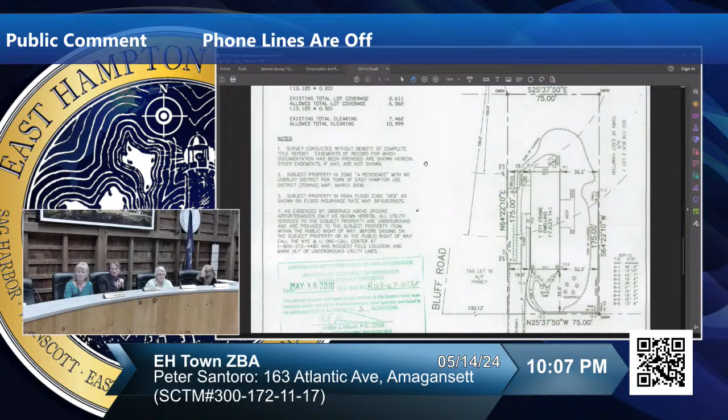All right, are we good, Counsel? Only one question though. I only heard from one member about the additional conditions of the original approval, about no mow. Does everybody agree with that? Yes, no mow - the same wording so that we put back to that, go back to that previous one. Where is the no-mow zone?

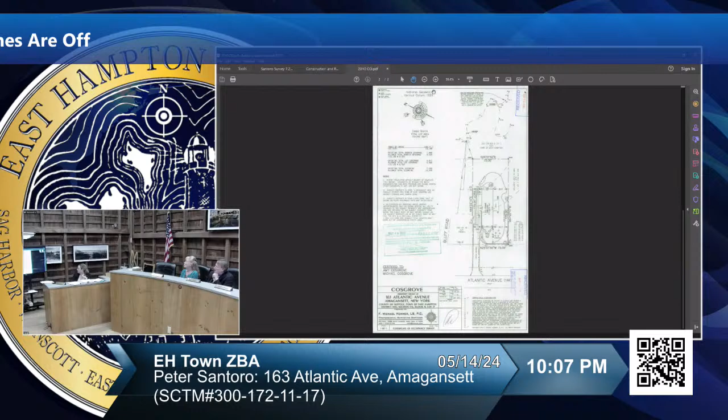Oh, where they're putting it - is that part of the 2010? It's the 2010 CO. Let's make sure we're looking at the right one.

Counsel, your question is regarding the no-mow zone pertaining to what? Member Mearing said she wanted that as a condition of this approval, to reconfirm that condition of the original approval applies again today. When you say original, what prior zoning board approval, which one? Well, that's what I'm asking - I want to make sure the whole board is saying yes, you want that as a condition of this approval.

So it was the determination from 2008, where the ZBA administrative NRSP approved the redevelopment of the property and construction of the house. Condition C: all areas disturbed by construction activities shall be revegetated with beach grass or other vegetated species native to the area of East Hampton. And condition F, which is the one we still use: the establishment of turf, lawn, sod, or ornamental vegetation shall be prohibited. But there's lawn surrounding the whole house.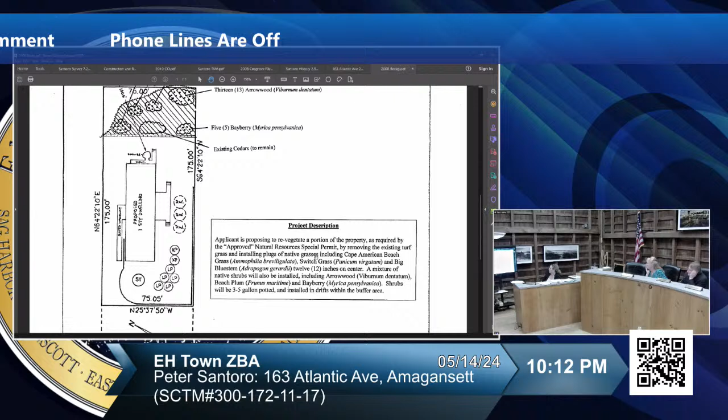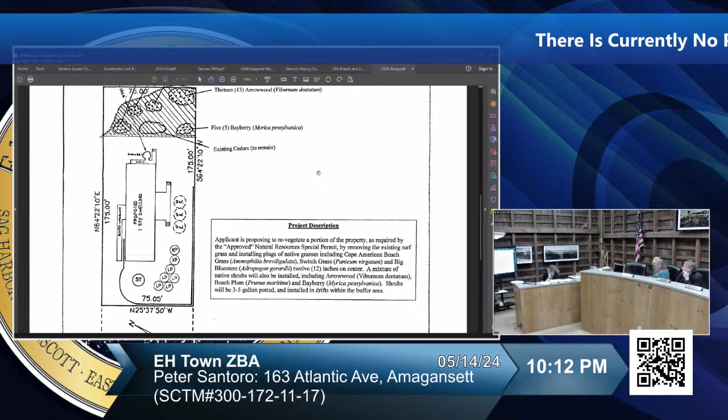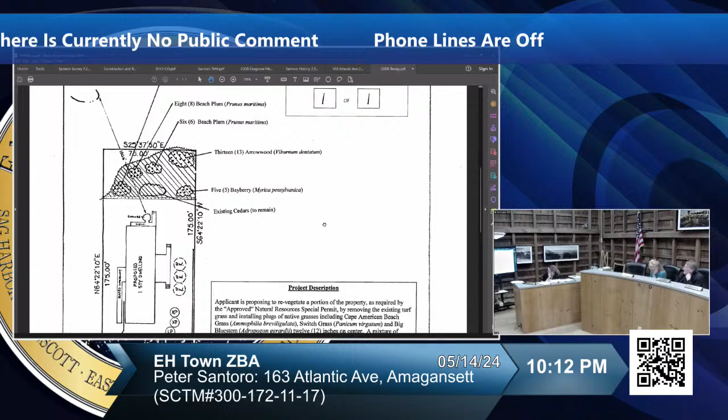It's this - I guess this is where the removal of the existing turf grass and installing plugs of native grasses, including beach grass, switchgrass, blue stem comes in. A mixture of shrubs will also be included, arrowwood, beach plum, bayberry, shrubs to be 3 to 5 gallons, within the buffer area. Why was he referring to

additional revegetation on the retaining wall as not being enough? That didn't exist in 2008, it existed in 2010. I thought it was a discussion. The CO shows top of the retaining wall. That's right, but he said it didn't make sense then.

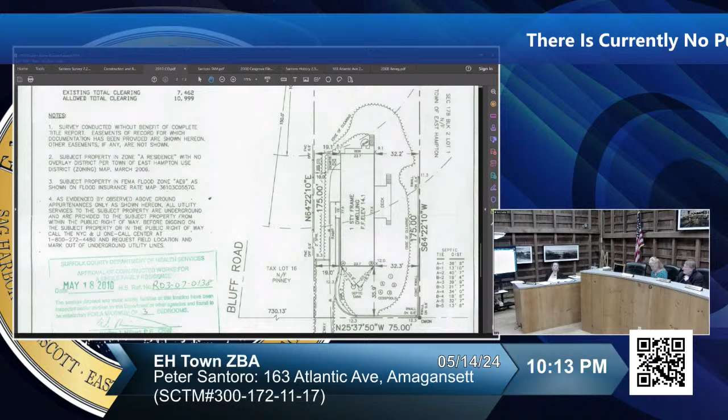We had an application before us not that long ago that had a block with fill on top, and it's been revegetated meaningfully in that area. Regardless, I would even approve the application if the lawn was gone and all beach grass.

But the two conditions I was citing were in the 2008 memo - it's sort of like a determination, but it was admin only, and it had all the conditions. On this document related to that 2008, they have revegetation that happened in here, that's not there anymore, it was removed. So are we reluctant to perhaps put revegetation in here?

That's one Terry's looking at now. This is in the existing conditions memo. So then I would even be comfortable saying it reverts back to 2008 conditions.

This says revised January 19th, 2010. That's where the clearing limits shown in 2010 come in. That's what I'm confused about. This is the James Rhymes land design. In terms of CO clearing, it matches essentially this here. The CO shows vegetation all along the edge.

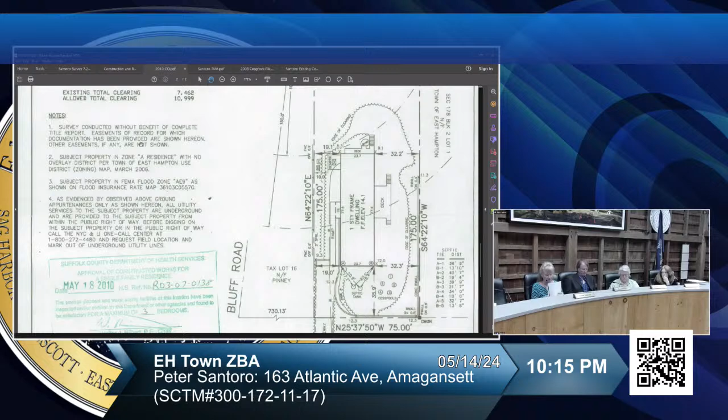Do we need a dry well for the shower? That's, we're good. Yeah, dry well for the shower would be appropriate.

I don't have the TAM in front of me, Tyler. Is there anything else that the board needs to talk about? So, I think we're now good.

I've really dissected this application. It's a good thing: fencing, re-veg plan, reducing system for the swimming pool, structures 2 feet above groundwater. That's it. So the board agrees with all of this? Yes. Okay, got it, we're done.

Okay, for a motion? Move on, do we need a motion? No, we just made... oh, no, right, we don't. Sorry, never mind, we have other decisions.

Tourmalet LLC at 250 Old Montauk Highway, Montauk, Suffolk, tax map number 300-87-3-4. It's a modification to a 2022 determination, and board members, I'm recused on this application.

Oh, I have a... you know what the problem is here? I denied this application. Well, it's still a modification. Let's hear what I would say, normally. I thought this has been going on forever, this one.

Well, since I've been on the board... oh, Platter Day, yeah, this one, you're thinking about the one next door. This one has yet to do construction. The one next door, Platter Day, they're doing construction, finished, done. Only took... this one, hopefully I do a good job.

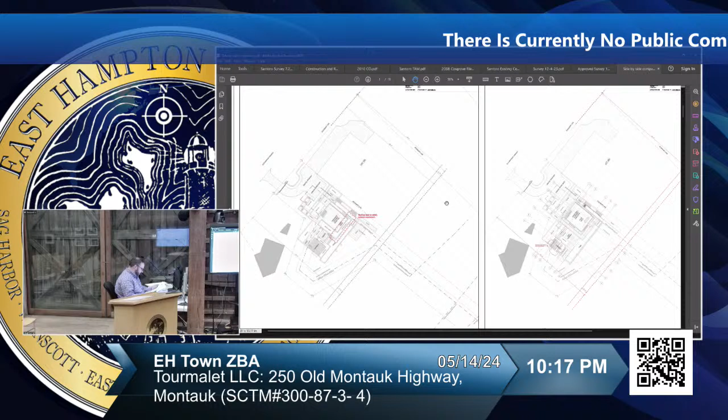The modification results in a 7 square foot reduction in gross floor area, a 333 square foot increase in building coverage—mostly because of a roofed area outside over like a patio—and an 885 square foot reduction in total coverage. The proposed modification does not appear to reduce the protection of the bluff face provided by the board's determination. It's really hard to show the work. I was looking at this today because I'm covering it.

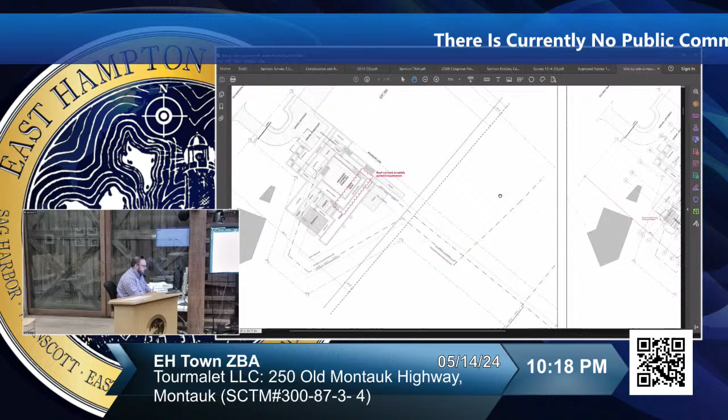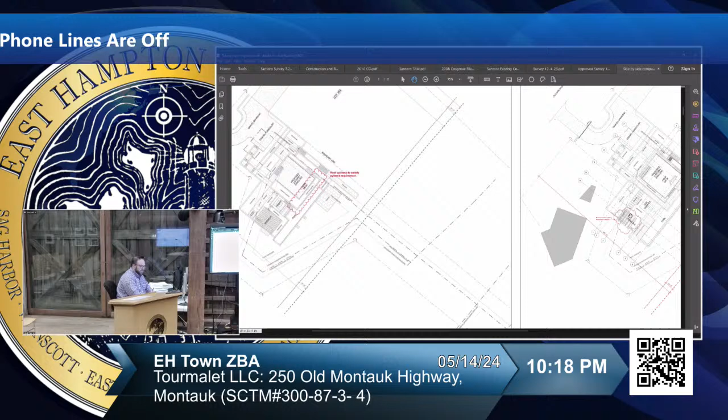So this is what was approved. There was this patio here, which on the updated plans you can see is removed. So they actually removed something slightly on the seaward face. Not a significant change. They made some minor changes to this area, the sun terrace—minor changes.

This is an easier view of the top floor, second floor. Again, there's a patio here that was approved, and it's been removed. The sun terrace has changes—there was a fire pit there. Again, minor changes to what's already there. There was a covered area in here that's been added, I believe.

And then on the first floor, some changes to the bedrooms, where different structures are located, and the general layout change. Again, this was approved—this is what they're proposing on this side. Minor changes, no changes in setbacks.

And in the basement, they removed a home theater and made it mechanical equipment and storage, and changed the layout a little bit. Again, very minor changes. They had a bedroom down there—it says in his memo.

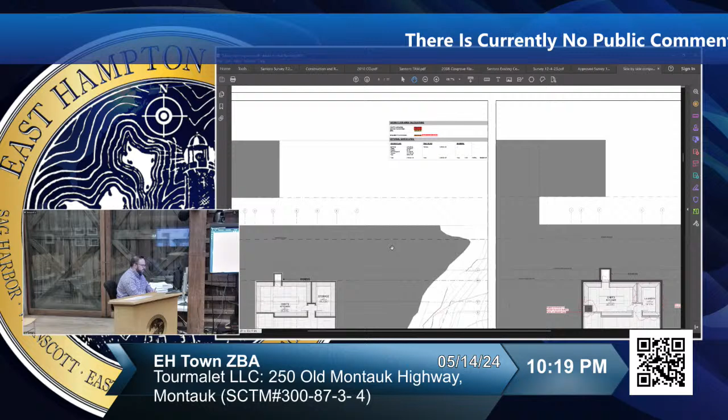I think the bedroom was on the first floor—that's where they added it? Yeah, there's a new bedroom on the first floor compared to what was approved. So they had a single bedroom down here, they changed it a little bit and added bedrooms up here.

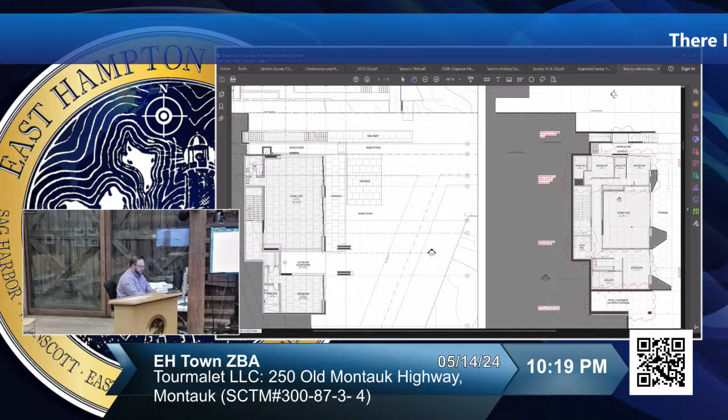Moved a few structures around. They made the gym smaller, but the footprint's the same. Won't count the gym. But they left the chef's kitchen. It's not an easy one to figure out.

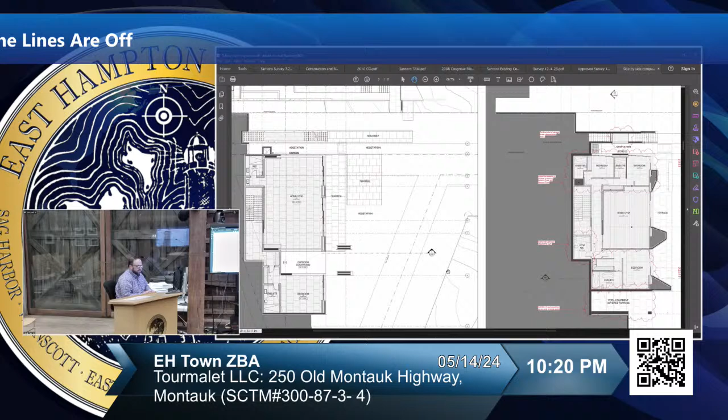Ultimately, the footprint really hasn't changed at all, and the impacts on the bluff are no different than what they were. It's their first modification, as far as I'm aware. Probably, yeah.

All right, I guess I'm okay with it. I'm okay with it, but I'm going to dissent. You're going to dissent? Yeah, I kind of have to—I mean, I wasn't in favor of the whole project. We can wait for Ed. That doesn't matter. Yeah, I guess we may have to then, because Roy's recused.

Oh, Roy's recused, okay. But we're going to table it. I think we have to—we're going to wait for Ed. After all that, we're going to table it, okay.

All right, next we have Denson and Michael at 414 Old Montauk Highway, Montauk, Suffolk Tax Map number 300-22-1-3.1. That's a request to leave the record open for an additional week. Can I have a motion on that?

So the application of Michael Denson at 414 Old Montauk Highway in Montauk, tax map 300-22-1-3.1. I make a motion to leave the record open until May 21st. Second. I concur. Thank you.

Draft minutes of April 30th, 2024. I make a motion to approve the draft minutes from April 30th, 2024 for the East Hampton Town Zoning Board of Appeals. Thank you. We can move on to resolutions.